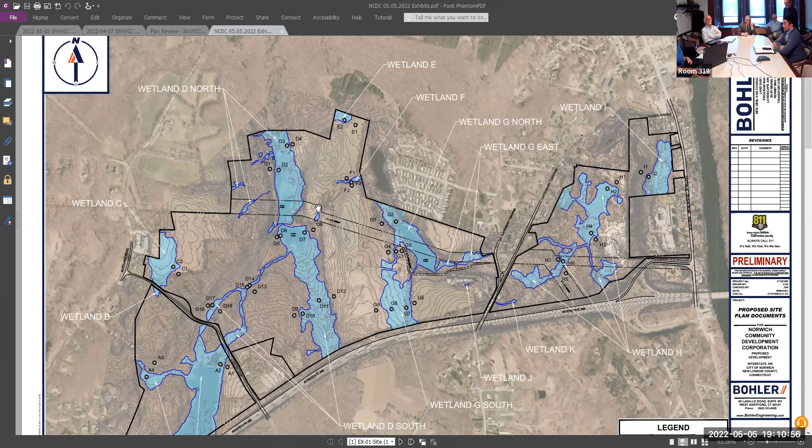So the applicants are present in the room. I have their presentation boards online as well. I just ask to make sure I'm following along with you on what you're talking about on the screen. And please state your names when you're speaking. If you need to move closer, you can, if you're gonna be speaking. And we're gonna be projecting it on this larger TV. If I'm in your way, let me know. So,

I'll open on behalf of the applicant. My name is Mark Block. I'm counsel to the Norwich Community Development Corporation. I have an office at 138 Main Street in Norwich. I'm here this evening on behalf of the applicant, Norwich Community Development Corporation, which is developing, as you all know, a parcel of land which has been known as Business Park North. I'm here this evening with Kevin Brown, President of Norwich Community Development Corporation, Mr. Henry Resnikoff, who is the Project Development Consultant, and the following professionals from Bohler Engineering and Land Tech: Jeff Ward, Brian Carey, and Chris Allen. And you should have the resumes of Mr. Ward, Mr. Carey, and Mr. Allen as part of the submissions of

NCDC. By way of brief background, while the overall project is the development of property which is approximately 283 acres, the application that's before you this evening is for approximately 8,000 feet of a proposed roadway to access the business park. It does not involve any other activity within the property, just this 8,000 feet of proposed road.

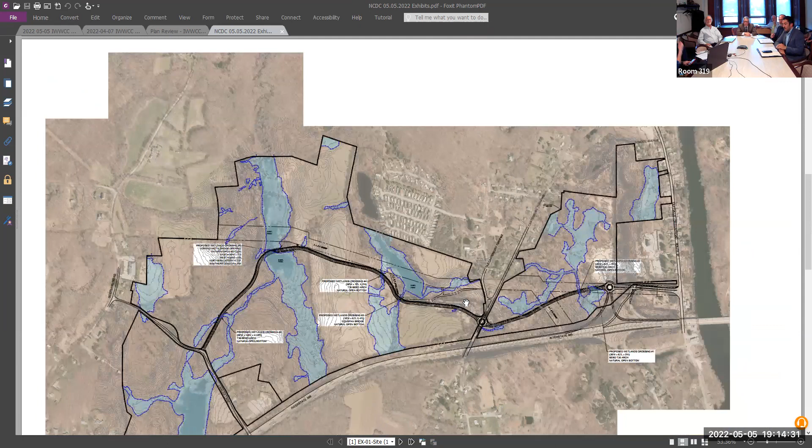I'd like to turn it over now to Mr. Ward. Thank you very much. Can we go to the next slide before I introduce myself? Dan, you go to the next slide. Can I clarify something though for you? Sure. Attorney Block? So the application is not just for the road. I think we're showing the lots correctly. We're going to show the development of the lots too for this proposal.

I mean, from our standpoint, it was just the roadway. There was no subdivision or lot creation. Not lots, but I thought the areas where the developable sites were going to go, wasn't that going to be part of this application? I know we had submitted an overall master plan just for reference purposes only. We did not have anything to do with creation of lots at this point, recognizing that down the road. So the permit for the wetlands involves the road only and not the wetlands that may be part of any future development? Correct. Okay, that's just to clarify.

Dan, do you want to explain the legal notice that we did? Or what it says, it's the developing of the lots, correct? Yeah, the portion that I read includes land disturbance associated with the future development sites that are part of the proposed park. So it was referring to the overall master plan. We know that it'll come back for individual lots as they're developed, or sites, whatever they may end up being.

I can say at a very high level, during our presentation today, we'll technically discuss the roadway itself in great detail. And as far as any sort of master planning comments or future development goes, we could speak about it at a very high level with what level of engineering and permits would go into future development. Okay, we'll let you continue, and then if it gets a little convoluted, we'll clarify. How's that? Perfect, sounds great.

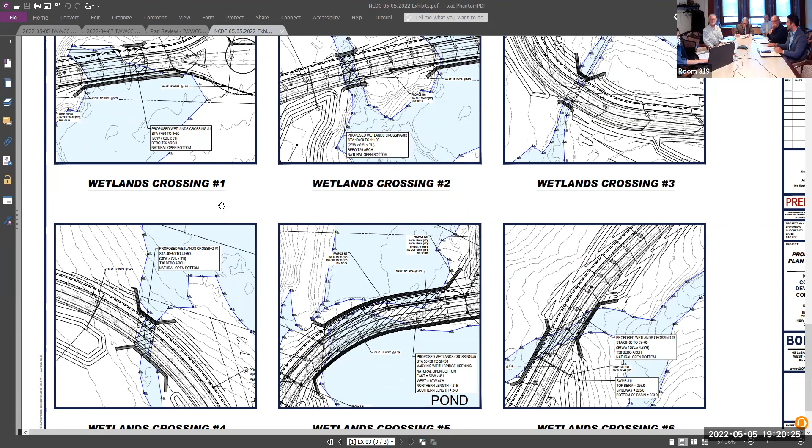You'll also notice that in most cases here, we're crossing at the narrowest point. So we're crossing where there was either an existing farm road that crossed in that location that we're just widening out or taking advantage of a natural crossing. And we did that in several locations where we just went to the narrowest point. We're able to span that, and any of the disturbances would just be temporary during the construction of the bridge, and it would go back to its natural state. So Dan, if you flip back to the previous page one more time.

Let's see, I talked about that. So there will be a seed mix planted in those 11 basins I referred to, and in the set of drawings, there were 5 different sheets for each of these areas that were kind of blown up. And we have a detailed grading and drainage plan for each, and all 11 of those have been detailed out with their respective overflows associated with them.

We also took very seriously, given the curbless design, given the length of the roadway, and the sensitivity to the wetlands, the soil erosion and sediment control plans. They were designed in accordance to the 2002 Connecticut Erosion and Sediment Control Guidelines, which basically means we have silt fence in the appropriate locations. We have a temporary construction entrance. We have inlet filters at all of the appropriate catch basins where there are some. We have a couple of catch basins in some of the lower points where we need to discharge into and treat TSS removal, or total suspended solids removal.

I think with that, that's big picture. There are several utilities shown. We did provide detailed utility plans. The majority of the development is handled by gravity sewer. There's one small section kind of to the western side between the two wetland bodies there that there will be a small lift station associated with a small force main there. And that's just to provide access to a gravity sewer.

And then gas, electric, and water are also readily available. We're working with Norwich Public Utilities to facilitate what that looks like and what infrastructure to provide at this time, knowing future developments pending. So that's big picture from a civil standpoint of what we're dealing with here.

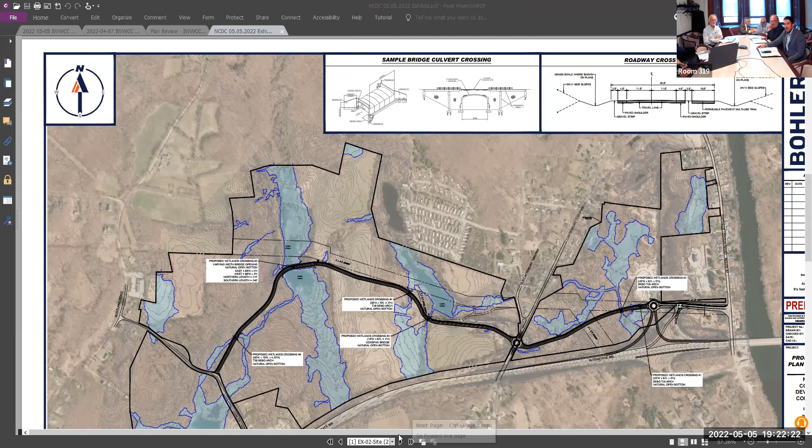Can you point out where the catch basins are and where that water will be directed? Yeah, Dan, if you maybe go to the next page, I have hard copies here. They're in the plan sets because each basin's individualized.

So for example, on the bottom, scroll down to number 5 right there. So on number 5, you can see that there's catch basins here and here, and then they go off to the top right-hand side of that inset. And basically, there's one of the 11 infiltration basins I was talking about. They discharge into that. So they're all treated.

They all have deep-footed sumps on them as well. So in the few instances that we did add catch basins, they're directly going and being treated, which is part of that 35,000 cubic feet of water quality volume we're providing. So there's a bit of redundancy because then on top of that, we have the gravel that goes up on the side. So it's just in a couple of the low-lying areas. That's where we did that.

All right, good evening. My name is Chris Allen. I'm an environmental consultant with Land Tech Consultants at 518 Riverside Ave in Westport, Connecticut. I am a professional soil scientist, registered soil scientist, and also professional wetland scientist. And I was responsible for delineating the wetlands on 284 acres or so.

I did have assistance from 2 other local registered soil scientists. So all of the wetlands were flagged by registered soil scientists in accordance with the Connecticut general statutes. And they were also delineated in accordance with Army Corps guidelines for federal jurisdictional wetlands. The boundaries are the same. The methodology of doing the delineation is slightly different.

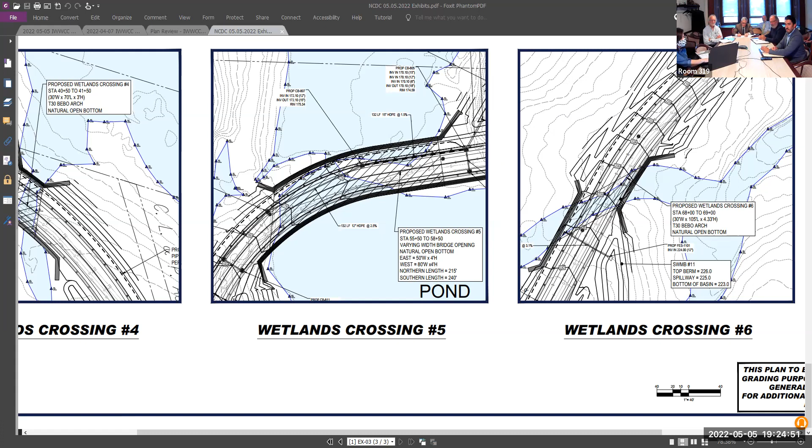So, like I said, the wetlands were delineated in November of 2021. All of the wetland flags, and there were a lot of them, I'm sure more than 1,000, were located by survey and added to the site plans. And the boundaries that you see on this map are surveyed locations of each one of those flags that were placed when we delineated the wetlands.

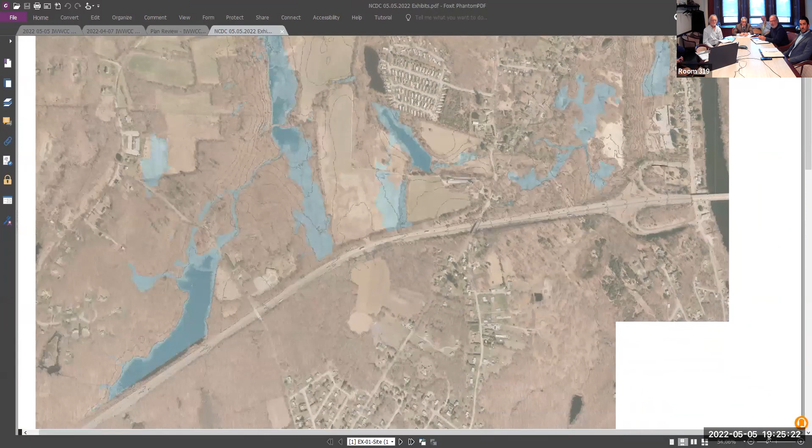So there's, I believe, 79.69 acres of wetlands throughout this entire parcel. And as you can see, it's kind of spread out throughout the property. There's several large wetlands. We did prepare a report, which is part of the application. It's dated April 5th, 2022. In order to facilitate description of these wetlands, we identified each by letter. So we identified them A through K, kind of starting at the west side and moving to the east.

So where the cursor is now, that would be wetland A. Up to the north would be wetland B and C, and then moving eastward, it progresses. So I can touch on some of the major wetlands. If you want me to get into any more detail, I can, but I'll just give you some brief descriptions, starting with wetland A, which is that one in the southwest corner.

I'm sure you've all seen this one as you're driving down 395. It's a big area of ponded water. A lot of it's ponded. And there is also some forested wetlands around the edges. That little finger that goes off to the left is a forested wetland area. This wetland is also associated with Bryan Brook.

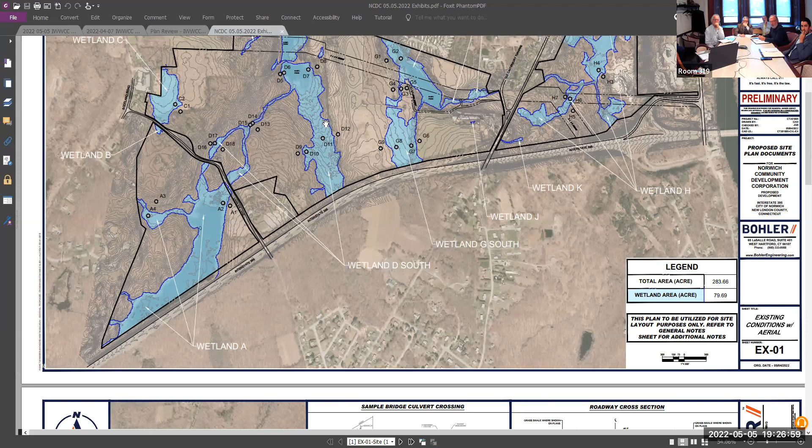Some of these wetlands are fairly disturbed on site, and some are kind of pristine, and some, such as wetland A and the large one in the center, which is wetland D, are pretty large, diverse systems. They contain different types of wetland habitat. Like I said, they contain Bryan Brook, which is an important resource.

Because these are flat areas, the beavers have been pretty active in both those areas, and that's pretty much why you have those areas of ponded water, because there are several beaver dams in those areas that have backed up the brook and caused those areas to pond. So like I said, those wetlands are pretty diverse. You have areas of open water, shallow open water. You have areas of emergent marsh vegetation. You have some scrub habitats, and then you also have forested wetland habitats.

So again, from a functions and values standpoint, wetlands A and wetlands D are pretty important. Then the other large wetland just to the east of wetland D is what we labeled wetland G. Part of that is within the Eversource right-of-way. It's underneath the Eversource right-of-way. Again, there's some open water habitat there, and then surrounded pretty much by common reed, also known as Phragmites, which is an invasive wetland plant. Probably not as much value as the other two wetlands.

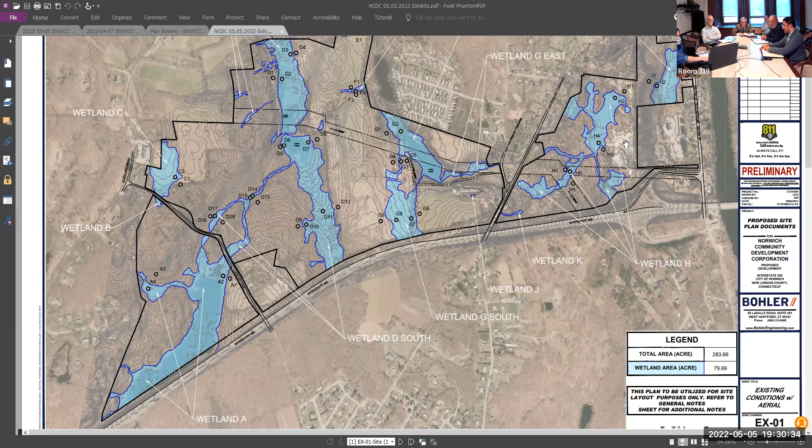And then even further north, I think that's wetland I, which is adjacent to Route 97. Again, that was an area that appears to have been quarried at some point. It has some areas of shallow open water, emergent marsh vegetation, and shrub vegetation.

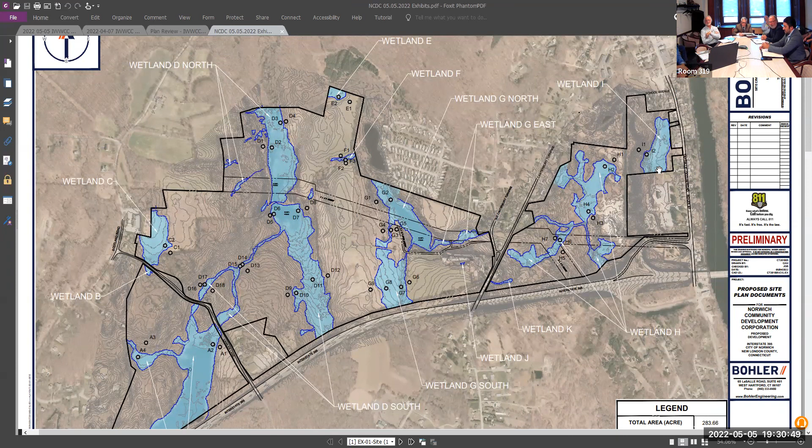There are some isolated small areas of wetlands that are man-made, such as Wetland K and Wetland J. I believe that Wetland K there looks like it was created to receive runoff from a couple of catch basins in Old Canterbury Road. It really doesn't go anywhere, it just kind of ends. And it is continually maintained. Last time I was out there, it was actively cleaned by the town, just so that it does continue to receive the flows from those catch basins.

There's another small one, I believe it's Wetland J, which is adjacent to the barn. It's just a little man-made excavation that holds water periodically. And I can get into detail about the others, but there's more details in our report. So if you refer to our report, you'll get more information on each one of those wetlands.

And I'd just like to reiterate what Jeff said. When the roads were laid out, the roads were pretty much designed to avoid as much of the wetlands as possible. So, as you'll see, the crossings are at the narrowest points or in locations where there is an existing farm road. Even at the crossing of Wetland D, which is that large central wetland there, where the road goes now, there is an existing roadway across there, a filled farm road that's partially breached in some areas. Yes, that area right there.

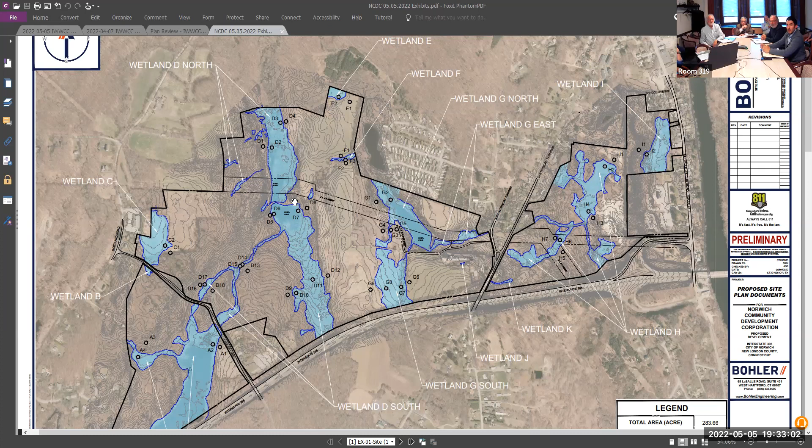Excuse me, for clarification, is that part of the plot what you are asking for tonight, or is it just the road that's to the east of there or to the west of there? Yeah, so the next slide shows the entire roadway, and it does include, okay, right, there you go. And that's all I have unless there's questions.

Doug, do you have any questions? I have no questions of the applicant at this time. Peter? No, nothing. Brandon? I have no questions at this time. Is Michael on? No, that's what we've been going back and forth. He's been trying to get on. He hasn't been able to. Dan, do you have anything to add? I don't have anything at this point.

Is the presentation finished at this point from the applicants? Are you done with your presentation for right now? For right now, yes. Okay. So Dan, do you want to go over the next steps here? So I will just say that we'd like a motion for, and Deanna has it written down next to you, Rich, if you want to see it as I'm reading it. It's for the public hearing to remain open until the June 16th special meeting, with a guided site walk to occur on May 26th at 3:30 p.m. with no public comment or Q&A to be taken at the site walk.

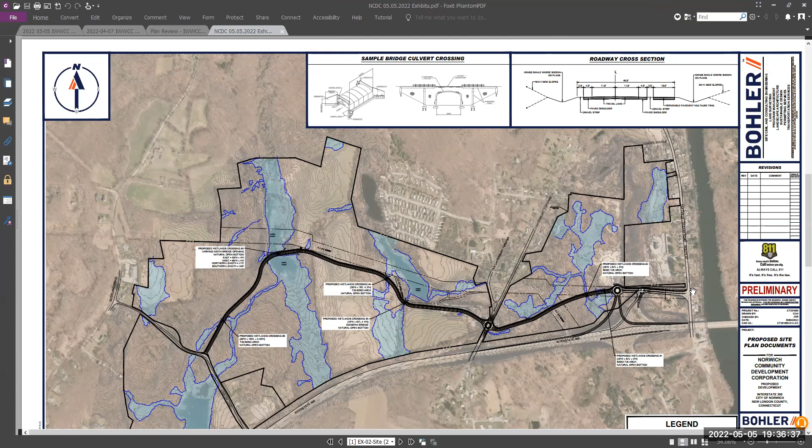Do I hear a motion? This is Doug, so moved. Is there a second? Brandon Hyde, second. All in favor? Doug, aye. Brandon Hyde, aye. Pete, aye. Any opposed? Hearing none, so moved. Thank you. So the next time we'll see you, we'll be at the site walk on May 26th at 3:30. Great. Thank you very much.

Thank you, gentlemen. I'll be in touch. Deanna, do you think there needs to be any further clarification at the next meeting? Yes, we can talk, because I want to address some things with Henry that would be helpful to you. Okay? We'll give you a call during the week? Yes. Because we have another application. Oh, sure. Thank you. All right, thanks. Thank you all very much.

Now, I'd like to bring up item IWWCC number 2204, Wawecus Street, water main extension and bridge deck replacement. This is the installation of an 8-inch water main along portions of Otrobando Avenue, Wawecus Street, and Browning Road. The project extent is from the vicinity of number 185 Otrobando Avenue to 44 Browning Road.

And there's also an additional replacement of a bridge deck for bridge number 103007 on Otrobando Avenue. Project requires a temporary disturbance of approximately 1,270 square feet of regulated area. It's an application of Norwich Public Utilities in the city of Norwich, and it's property of city of Norwich. And we have Kyle Halbert from CLA on to speak about the project.

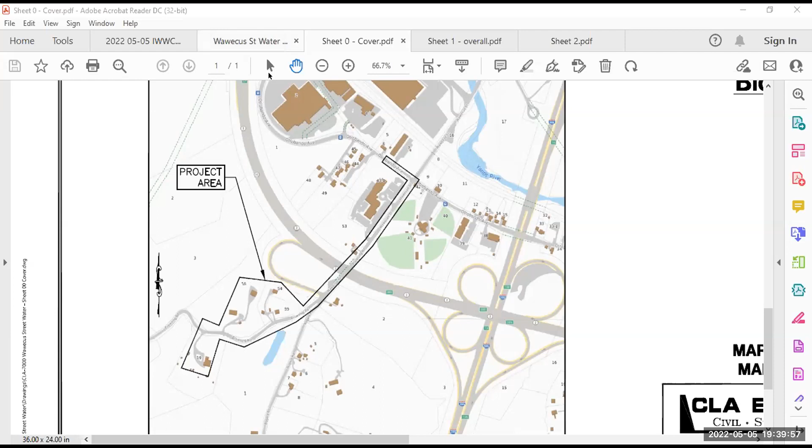In particular, the area that we're talking about, this is right at the intersection of Otrobando Avenue and Wawecus Street. This parking area in here is for the medical office building. And this driveway entrance here is for a small condo complex right in this area. As I noted, the water main currently terminates right about here. There is an existing 2-inch water service that crosses Otrobando and crosses through the middle of the bridge that we'll talk about in a second, right in this area, and then continues to the Little League fields. It only services the Little League fields at this point.

There is also a gas main that runs in parallel with the water, also crosses directly through the middle of the bridge crossing, and then continues up Wawecus Street and Otrobando Avenue. The water main project stays primarily within the roadway. Through the entire rest of the project, the water main will be installed within the roadway. What we're proposing is at this bridge crossing right here, in lieu of crossing through the bridge like they do with the service now, we're proposing to cross at the southern inlet side of the bridge.

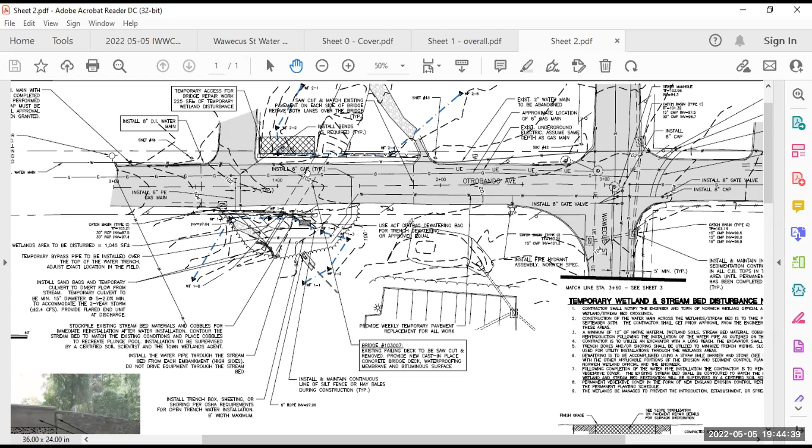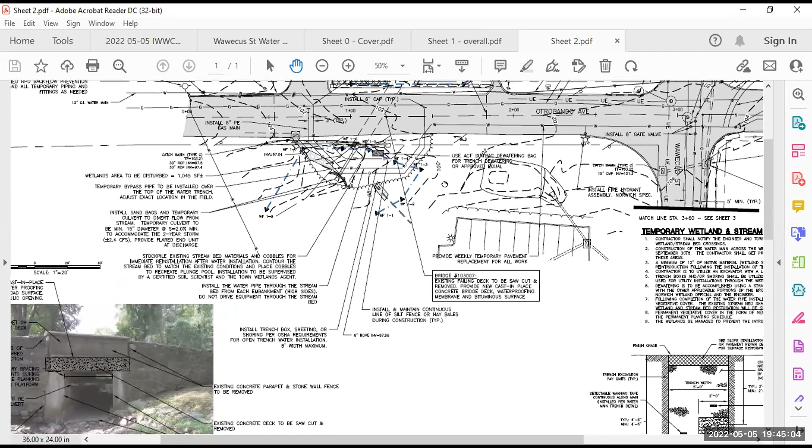The abutments themselves are in good condition. There is a concrete channel that runs through here that is also in good condition. So what we're proposing is saw cutting and removing the existing concrete deck. You can see here more clearly, I guess. These abutments will stay here, and then we will pour a new concrete deck above the existing abutments. If there are any questions or any comments, I will be happy to answer.

Are you going to dam the stream up so that you can work in that stream bed? Or divert the stream? The intention would be to work during the dry time of year. This stream does dry up. Okay. So the intention would be to work during the dry time of year. What we have done is we have a provision for a temporary culvert. You can see right here. So if necessary, and if there is some minor flow through the stream, we've sized the culvert to temporarily divert water over any of the trench.

We anticipate the work through the wetlands to take about 3 days. It would be about a day for the water, a day for the gas, and then a day for restoration. So it would be a short duration construction through this area. Doug, do you have any questions? No, I do not have any questions of the applicant. Peter? No, no questions. Brandon? I do not have any questions. I think this is a necessary project and it looks like they took all the necessary precautions.

In that case, do we have a motion to approve? Well, Rich, I just remind you, we need a motion on whether or not a public hearing is warranted first. Okay, this is Doug. I would move that a public hearing is not required for this application. Brandon Hyde, second. There's a motion on the table. All in favor? Doug, aye. Brandon, aye. Pete, aye. Any opposed? Hearing none, so moved.

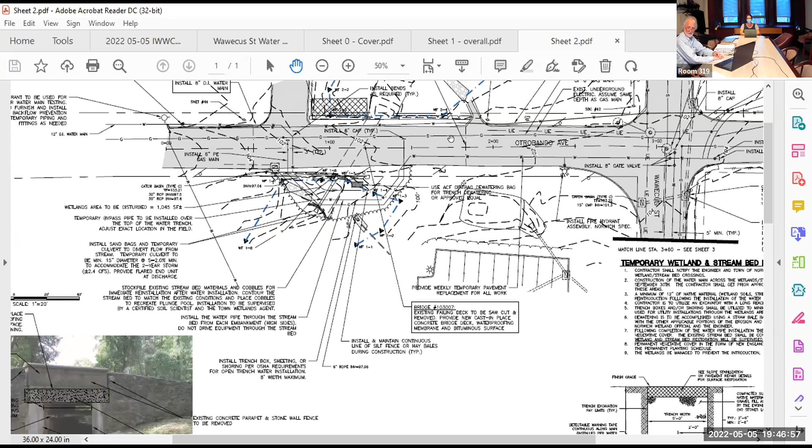Can I interrupt for 1 second? Sure. Can I ask, Doug, if you can clarify why the public hearing isn't required? Is it because you're finding that it's not a significant activity, or that the erosion and sediment controls proposed are appropriate for the project, or a reason, so we can have that on the record, please? Yeah. For everything you said. Okay, the E&S is sufficient. Okay, thank you. Got it, thanks. So now we need a motion to approve.

I would just chime in here. I have some of the usual conditions on my memo. If you could just add that in your motion, that they be addressed. Doug? I'll be right with you. This is the memo for this one, so while we get some of these down, following comments. Okay, Dan has comments and conditions 1 through 4. The final revised plans be submitted and reviewed by city staff. Applicant should have the signature of the certified soil scientist added to the final plan.

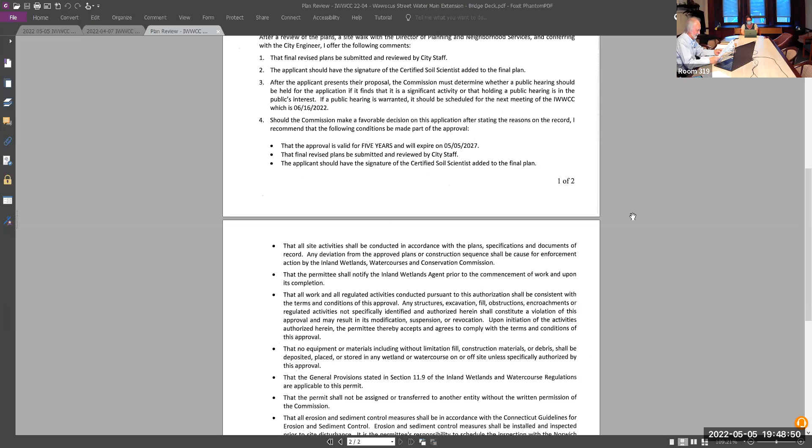After the applicant presents their proposal, the commission must determine whether a public hearing should be held for the application if it finds a significant activity. Okay, we've done that. Should the commission make a favorable decision on this application, after stating the reasons for the record, Dan recommends that the following conditions be made part of the approval. That the approval is valid for 5 years and will expire on 5/5/2027. That final revised plans be submitted and reviewed by city staff. The applicant should have the signature of the certified soil scientist added to the final plan. That all site activities should be conducted in accordance with the plan's specifications and documents of record.

Any deviation from the approved plans or construction sequence shall be cause for enforcement action by the Inland Wetlands, Watercourses, and Conservation Commission. That the permittee shall notify the Inland Wetlands agent prior to the commencement of work and upon its completion. That all work and all regulated activities conducted pursuant to this authorization shall be consistent with the terms and conditions of this approval.

Any structures, excavation, fill, obstructions, encroachments, or regulated activities not specifically identified and authorized herein shall constitute a violation of this approval and may result in its modification, suspension, or revocation. Upon initiation of the activities authorized herein, the permittee thereby accepts and agrees to comply with the terms and conditions of this approval. That no equipment or materials, including without limitation fill, construction materials, or debris shall be deposited, placed, or stored in any wetland or watercourse on or off site unless specifically authorized by this approval.